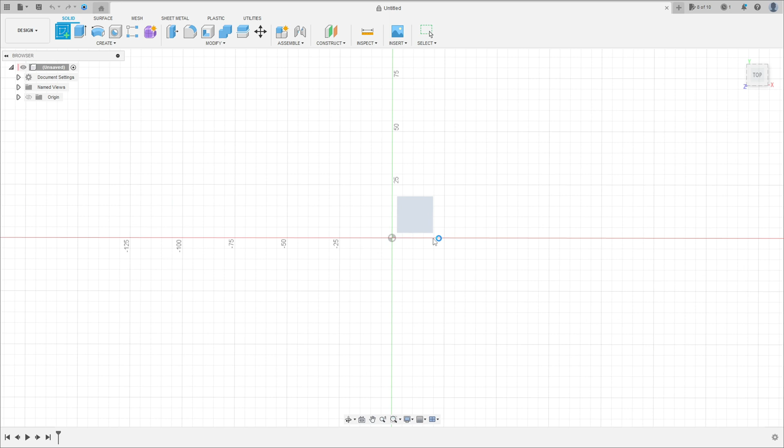First, go to Create a Sketch and select the top plane. Select the center geometry circle, click in the midpoint, make a circle here with 50 millimeters of diameter, press OK and finish the sketch.

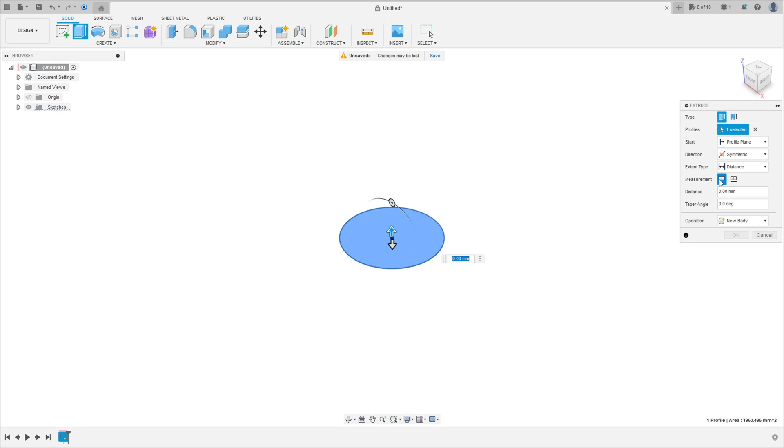Now go to Extrude, select this profile. The direction is symmetric, measurement whole length, and the distance is 30 millimeters. Operation new body, press OK.

Now go to Construct, select the offset plane, click in the front plane, and make a plane here with minus 25 millimeters, press OK.

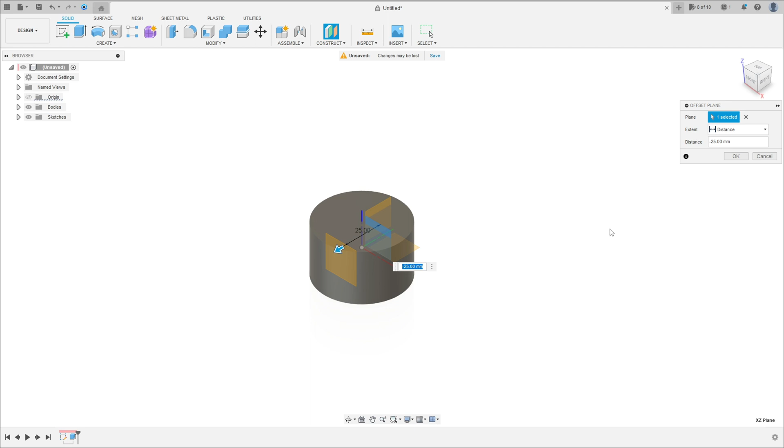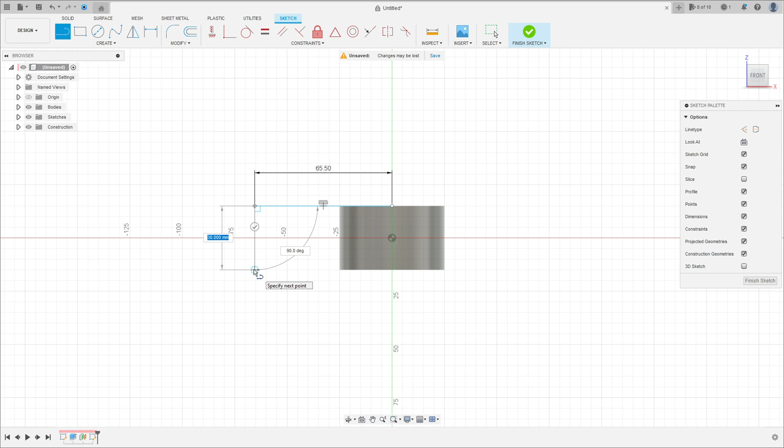Now go to Create a Sketch and select this new plane. Select line, click at this point, make a line here with 65 millimeters, 0.5. A line here with 30 millimeters, another one here.

Now make a line here, 30 millimeters. Close here.

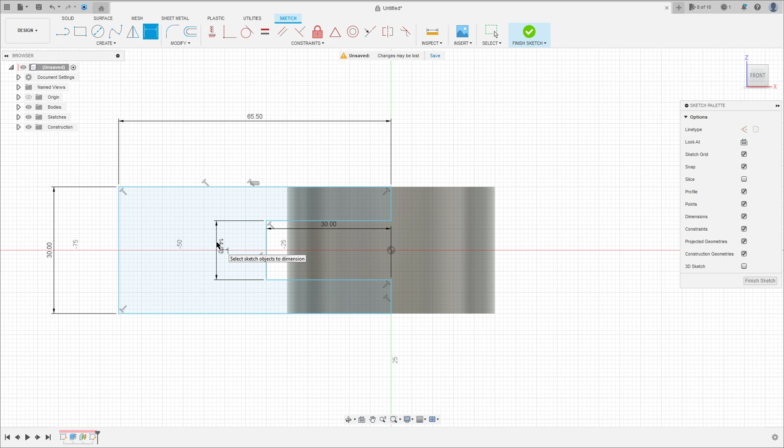Go to sketch dimension. This line has 14 millimeters. Go to constraints, select equal, click in this line and this line here.

Now go to create and select project include and project. Click in this face, press OK.

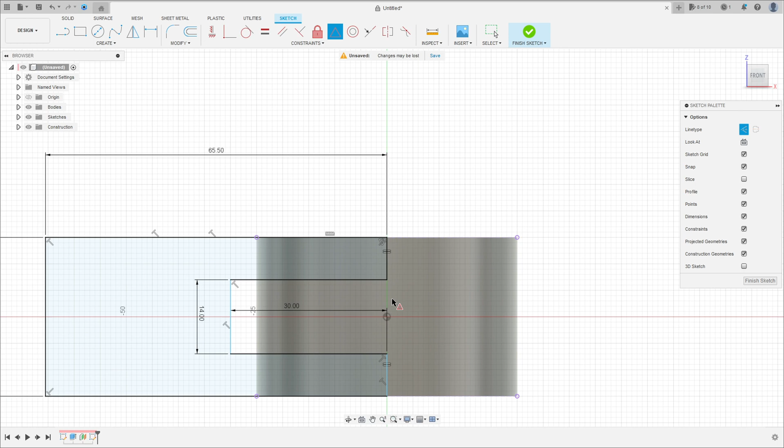Go to the constraints midpoint, click in this line and click in this point, and click in this line here and click in this point. OK, finish the sketch.

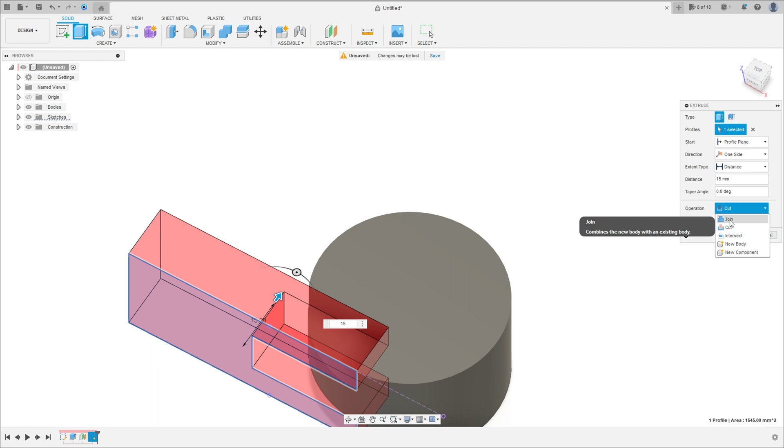Go to Extrude, select this profile here. Extrude this 15 millimeters. Operation here is join, press OK. We have this.

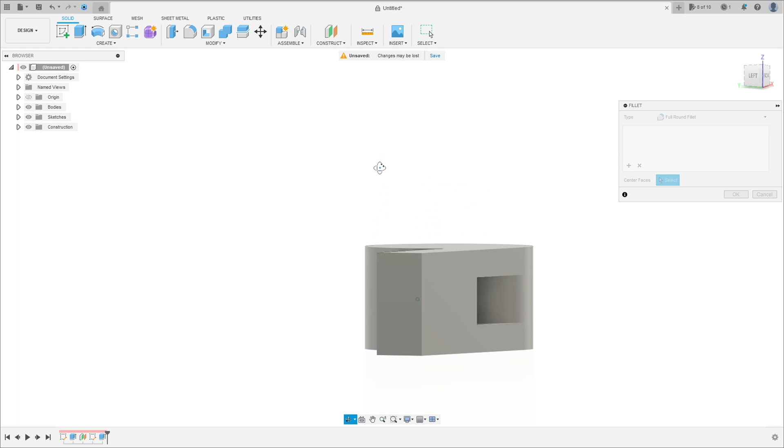Go to Modify, select Fillet. The fillet here is full round fillet. Select the face here, and this face here. Press OK. We have this.

Now go to Create a Sketch and select the front plane. Select line, make a line here with 25 millimeters.

Go to constraint midpoint, click in this line in the center here. Select line again, click in this point, make a line here with 30 millimeters.

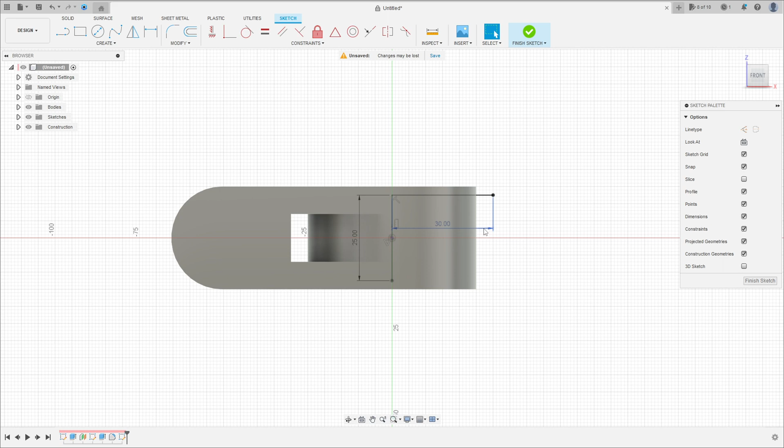Go to create and select arc, center point arc. Make an arc here with 12.5 millimeters. Select a line, make a line here.

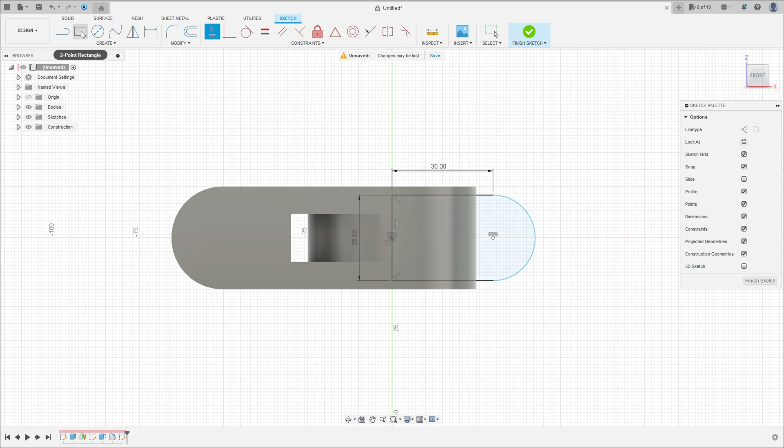Go to constraints, select horizontal vertical, click in this point here and this point here. Go to sketch dimension, the radius here is 12.5. Press OK, finish the sketch.

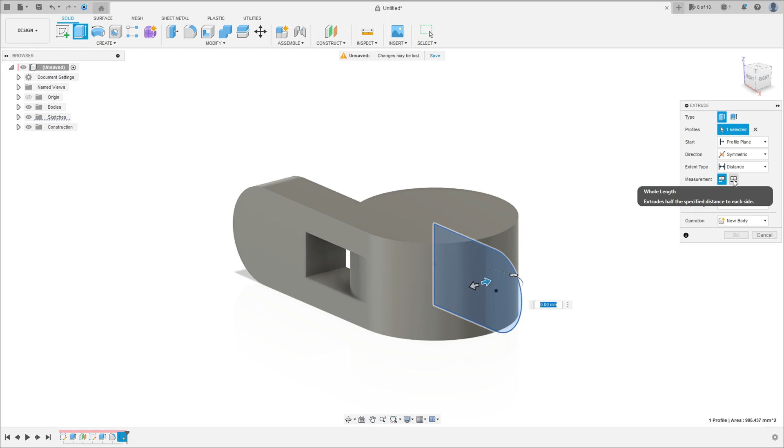Go to Extrude, select this profile. The direction is symmetric, measurement whole length, and the distance is 30 millimeters. Operation join, press OK. We have this.

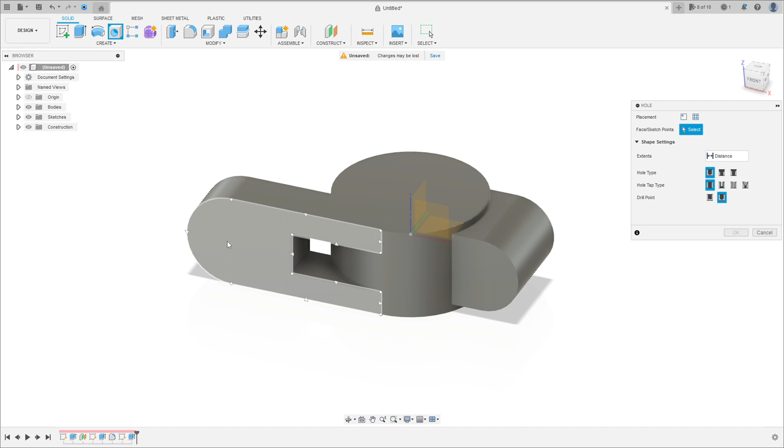Now go to create, select a hole. Click in this space. The extent will be all, the hole type counterbore.

The distance here is 11 millimeters, the distance here is 6 millimeters, and the distance here is 6.6 millimeters. Press OK.

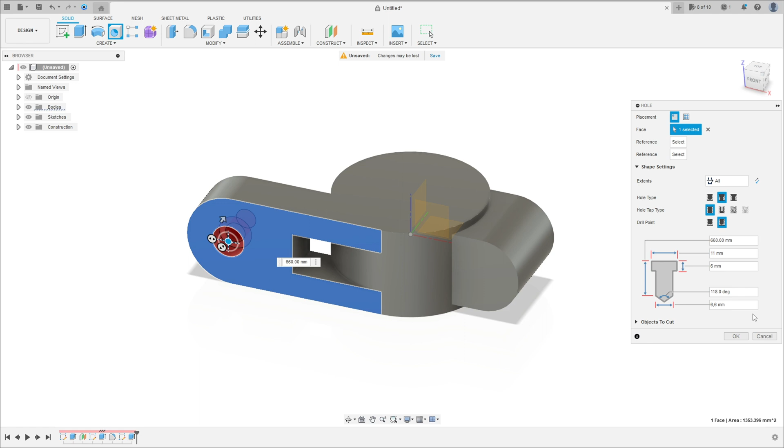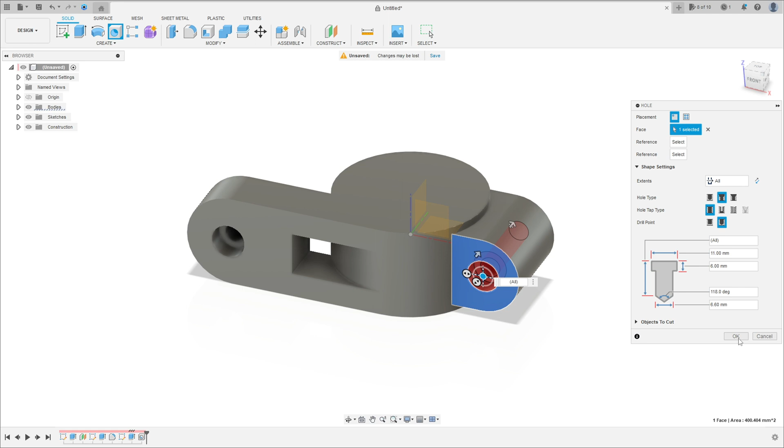Let's make one more in this side here with the same distance. The diameter here is 11, the distance is 6 millimeters, and the distance here is 6.6 millimeters. Press OK. We have this.

Now go to this side here, go to Create a Sketch and select this face. Go to create and select the polygon, circumscribe polygon. Click in the center of this circle here, make a polygon here.

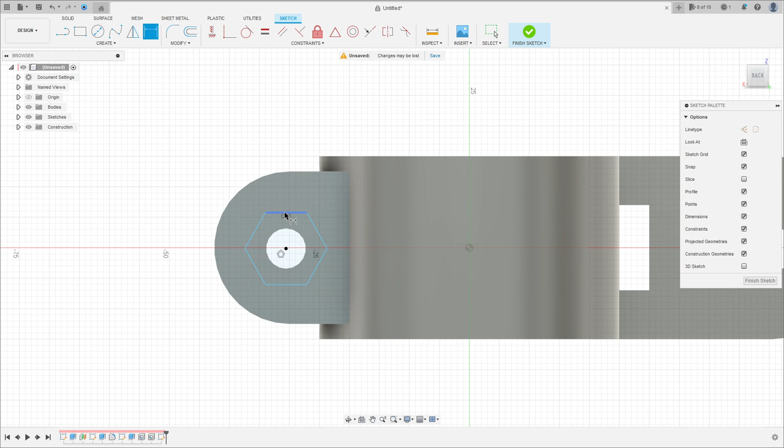Go to constraint, select horizontal vertical, click in this line. Go to sketch dimension, click here and here, the distance is 11 millimeters, press OK. Finish the sketch, go to extrude, select this profile here.

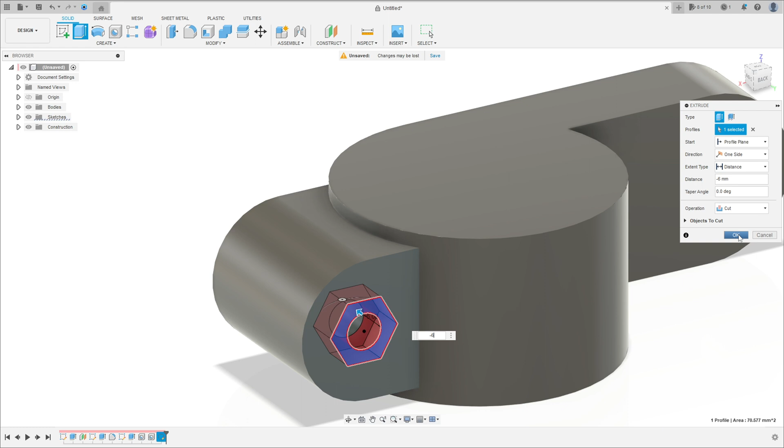Extrude this minus 6 millimeters. The operation is cut, press OK. We have this, good.

Now go to Create a Sketch, select this face here, select a circle, click in the midpoint, make a circle here with 42 millimeters of diameter, press OK.

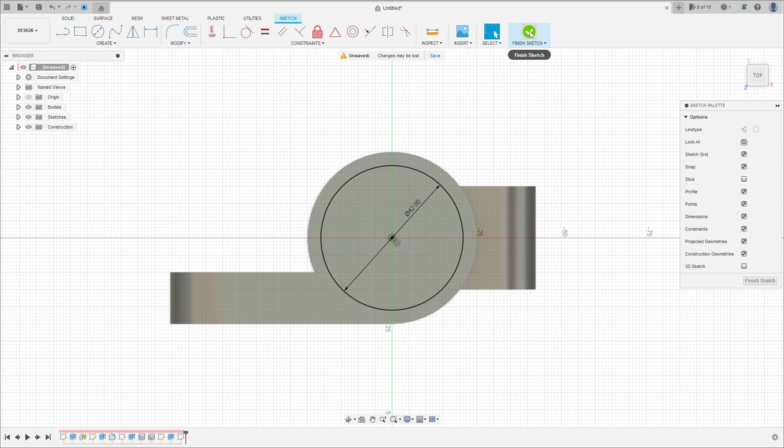Finish the sketch, go to extrude, click here, operation cut. The distance here is all, press OK. We have this, that's good.

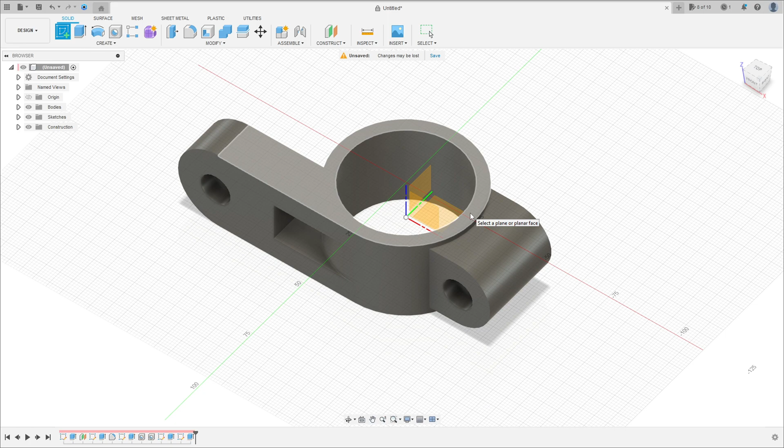Now go to Create a Sketch again, select this face, select line, click here, make a line here with 42.5 millimeters, press OK.

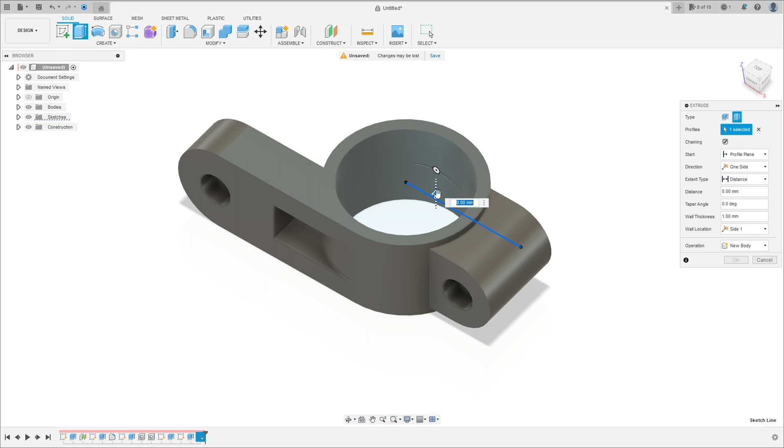Finish the sketch, go to extrude, select the thin extrude, select this line here. The operation is cut. Let's drag this 36 millimeters. No problem, can be more.

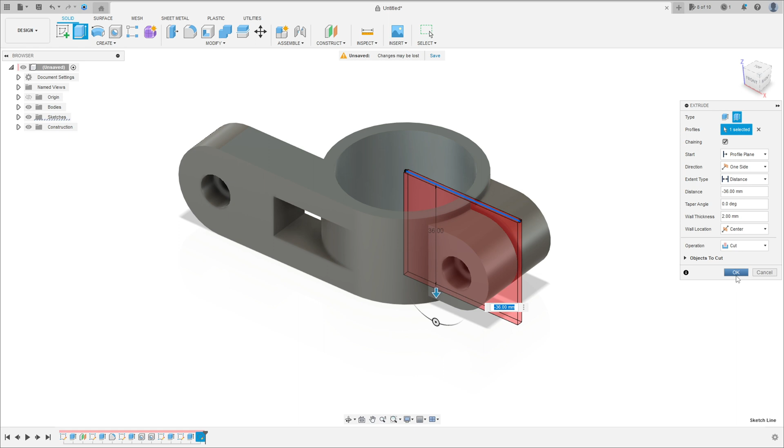The wall thickness, 2 millimeters. The wall location, center. Press OK here. We have this, great.

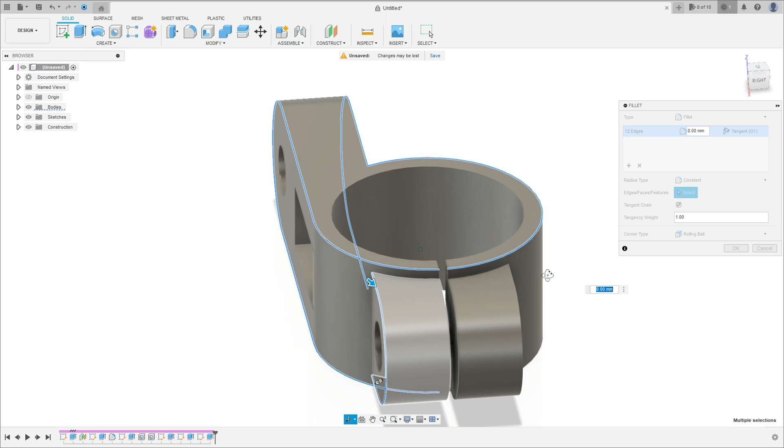Now, to finish this, we'll make a fillet here. Go to Modify, select Fillet. The type fillet: select this edge here, this edge, this edge, this edge, the bottom here. The fillet here is 2 millimeters. We have this, good.

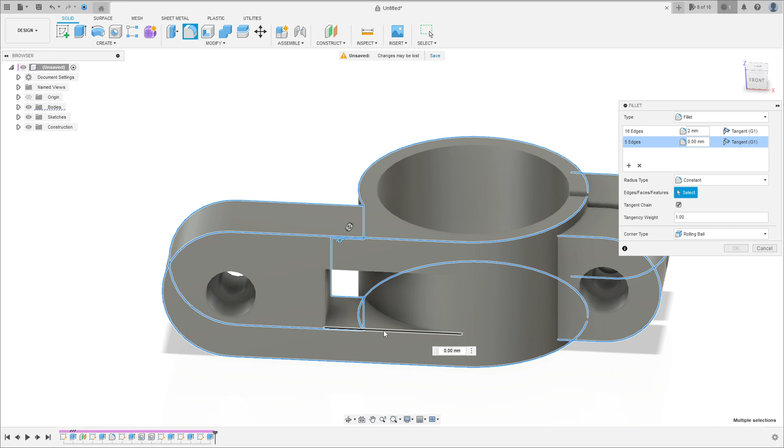Now go to Add Selection Set. Select this face, this edge here, this edge, and the side edge here. The fillet here is 2 millimeters too. We have this.